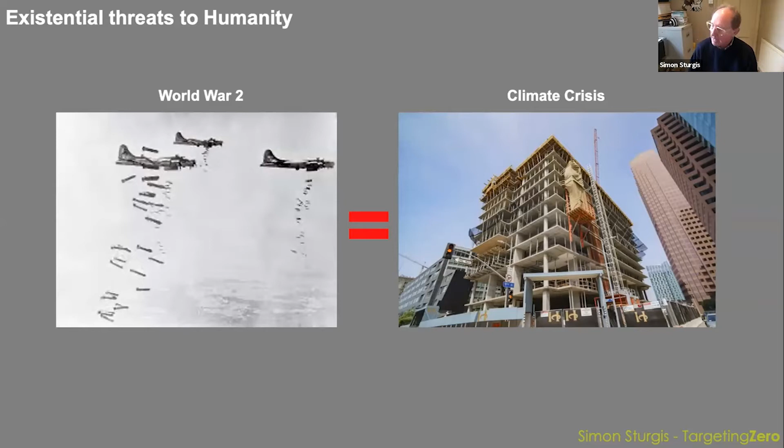But I would also equate it to construction, because if you think of the volume of construction and the impact of carbon emissions, these two things, and it's arguably a controversial observation, are not so far apart. And if you think I'm exaggerating, look at global construction to 2060: one new Greater London every 7 weeks. That is a phenomenal amount of construction. And the impact of that globally on the climate is phenomenal.

And the interesting thing is, if you look at the countries that are most responsible for resource use, on the left there you've got the number of Earths required per capita to achieve that kind of consumption, and on the right you've got carbon emissions. You'll see the same basic culprits in both cases.

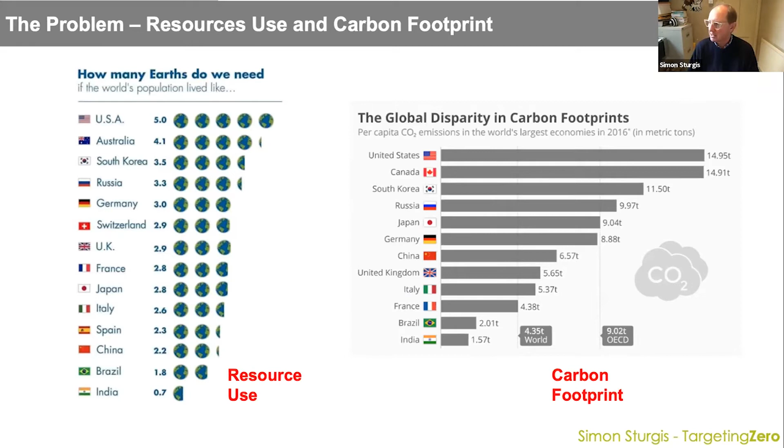And in the UK, what we're trying to do is achieve net zero by 2050, which was passed by the Theresa May government. And then you've got 78% reductions by 2035 passed by the Johnson government, which are significant asks. What has generated that is Paris 2015, COP21, which fed into the Climate Change Committee, net zero by 2050, and then the UK government's 78% reduction by 2035. So that is the current policy concern.

So getting to zero, how do we get to zero? I thought I would explain this, though I'm sure many of you are familiar with it, in terms of the modular approach. Top left, module A, upfront emissions in the green box, which are the product stage and construction stage emissions. Then you've got the in-use stage, the module B emissions, which include repair, replacement, and refurbishment, all material related. Then in blue, you've got operational energy use and operational water use. Those together with the pink represent in-use emissions.

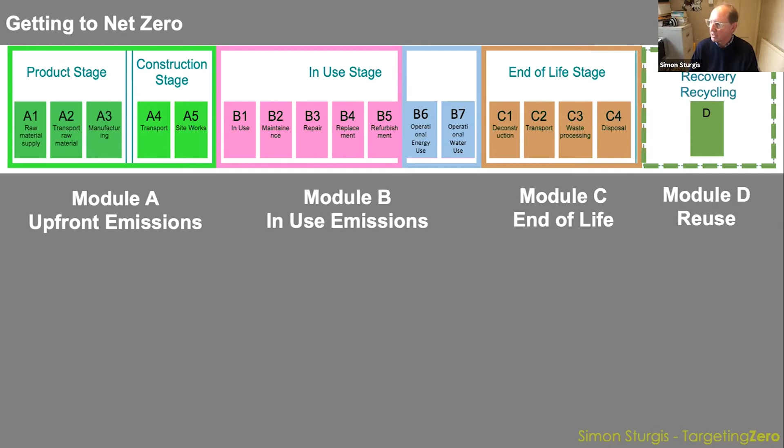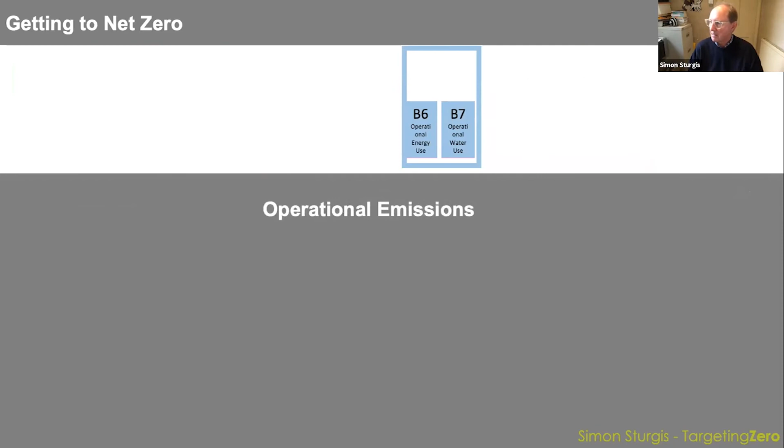Then you've got the end-of-life stage, reuse, recovery, and recycling. So all of those together represent embodied emissions, A, B, and C, but only part of B, because B6 and B7 represent operational emissions. If you add all of those together, excluding D, A, B, and C together represent whole life carbon. And to achieve net zero, you have to achieve the maximum CO2 reductions through good design, plus any residual offsets. That would give you a net zero position.

And how do we actually get to that? Well, the starting point is retrofit. Both of these building schemes here are retrofits. The one on the left is a Victorian warehouse which has been retrofitted. The one on the right is a retrofit of an existing city building, and the retrofit is saving 58,000 tons of CO2 compared to a new build version.

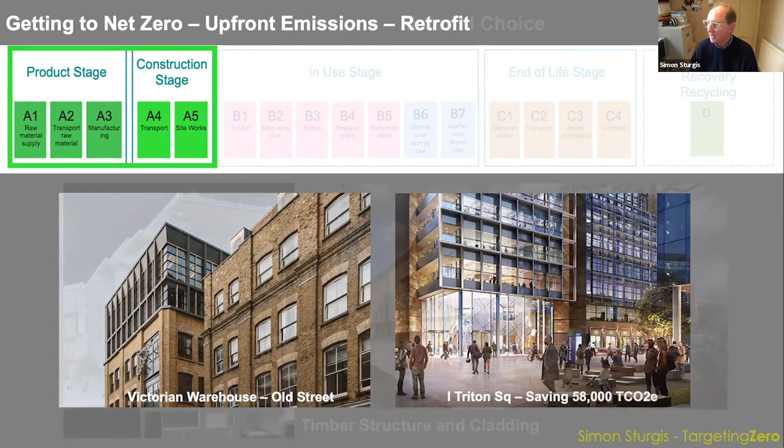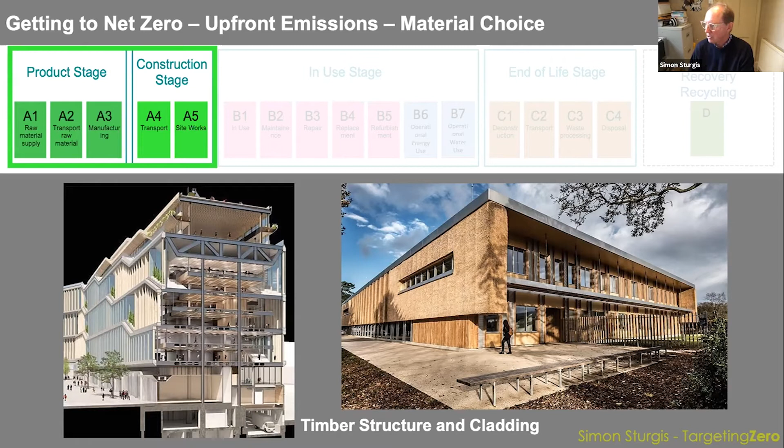Also, at the construction stage, there's the relationship between new and recycled material. New aluminium is essentially for when you're going to anodize, because you get a consistent substrate. If you're going to use recycled aluminium, then you can powder coat, which of course gives you more flexibility.

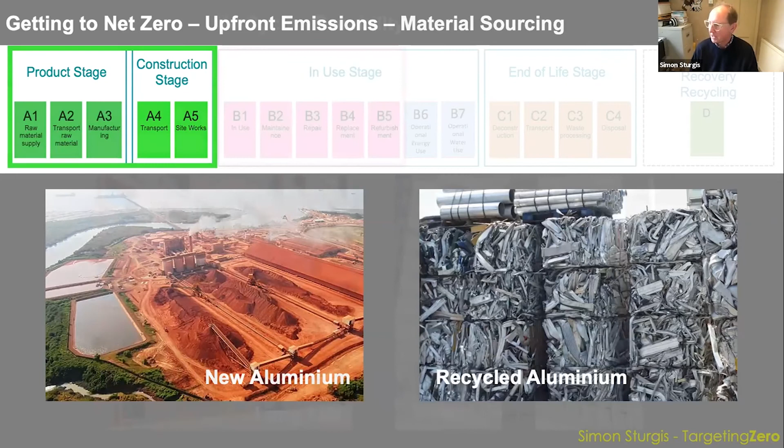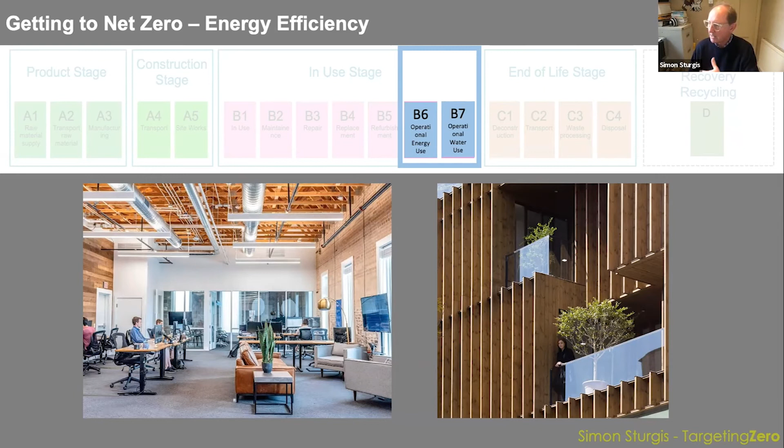You've also got energy efficiency, which I'm sure we're mostly familiar with, and things like fabric first and the louvers to protect the facades. So there is a whole range of things that we can do to improve the performance of buildings. And the end of life stage is interesting because, of course, if you're demolishing, then typically it all goes to waste, and waste also tends to be a much lower level of activity. For example, the waste goes to road fill and so on.

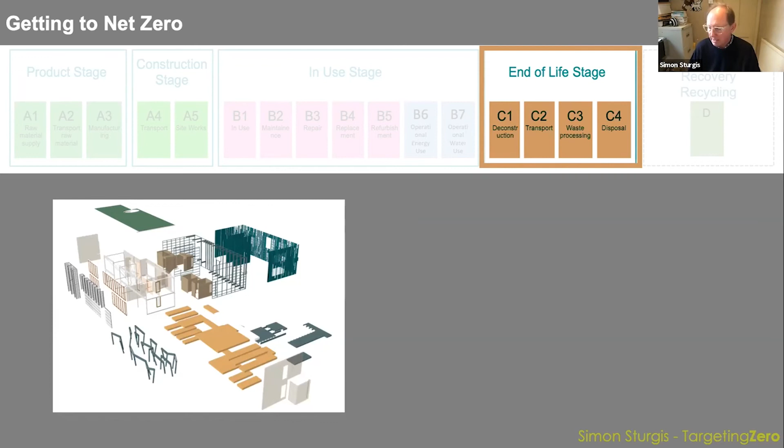But if you can actually rebuild the building, now this scheme here on the right is a project by Segro, which we in fact moved from one site in Slough, where it was going to be just demolished. We actually just had it dismantled, moved to a new site and rebuilt. And that saved a lot of money, it saved a lot of carbon, and relatively few things had to be replaced. The roof membrane, the foundations had to be replaced, but fundamentally all of that is effectively second-hand material.

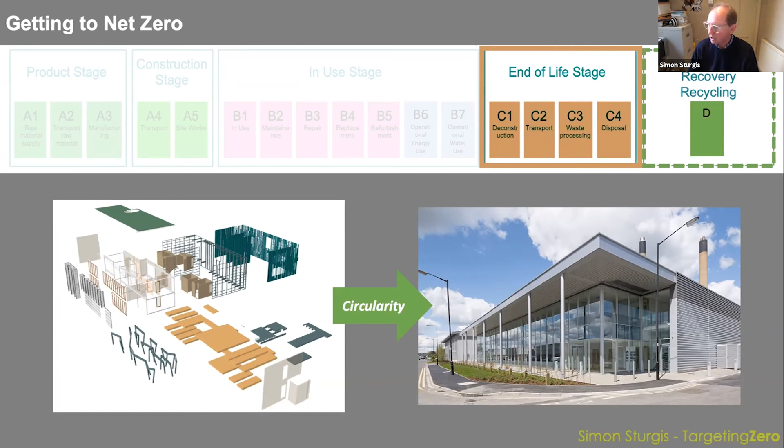So it shows that it can be done. But of course, that building wasn't designed to do that. Had it been designed to do that, we would have achieved greater benefits in terms of cost and carbon. And in terms of cost, there is this perception that low carbon is an expensive activity. This is the Google building, which is under construction in King's Cross in London.

And we were looking at the tender packages from the perspective of carbon as opposed to the perspective of financial cost. And what we found was that the one here you're looking at is the lowest tender cost, which happened to be the same tender package as the lowest carbon cost. And so we found a direct correlation across certainly about 95% of the tenders across this overall tender. So there's a direct correlation we found between low cost and low carbon.

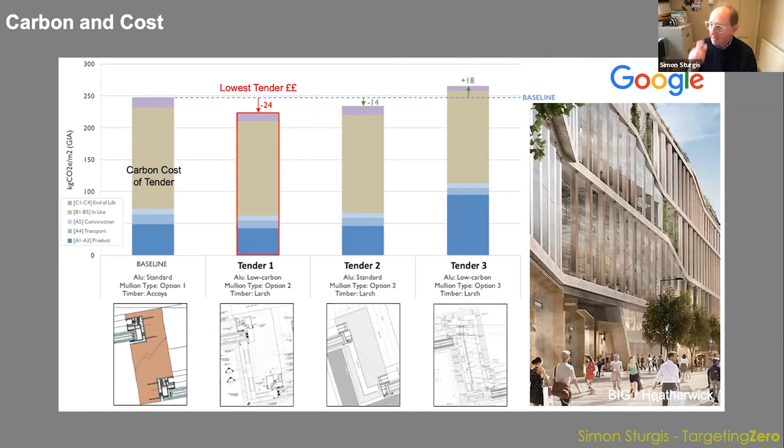If we look on the left here, you've got a column which represents the sort of total package of energy and material, the new office building, the emissions over about 60 years. So this is showing kind of the build-up of that. And I would suggest, and it's certainly my experience, that using current technology and current supply chains and so on, it is certainly possible to get 20–30% reductions, which are cost neutral. And certainly with the developers that I've been working with who will not spend extra money, this is the kind of thing that can be done.

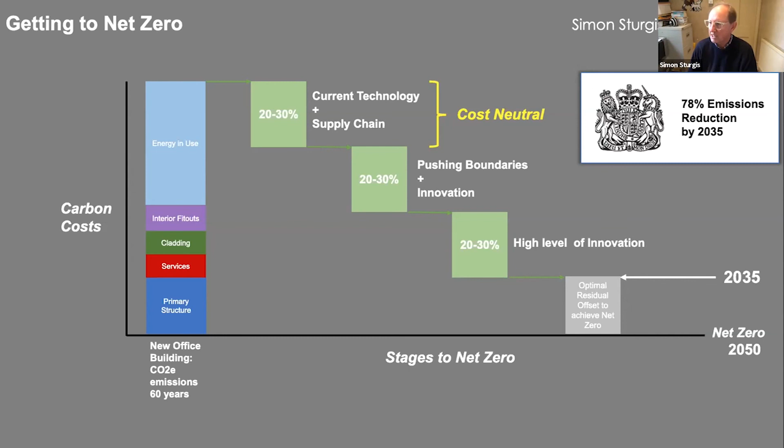So we have out there ready to achieve reductions, I believe, of 20–30% without having to spend additional money. When you get to the next step down, you're trying to push the boundaries a bit more, there's a bit more innovation required. And the next step down is obviously a much higher level of innovation. And finally, whatever's residual would be treated as an offset. So I think there's plenty of scope to act right now in order to meet that 78% emissions reduction by 2035. We just need to be a bit more imaginative of what we do.

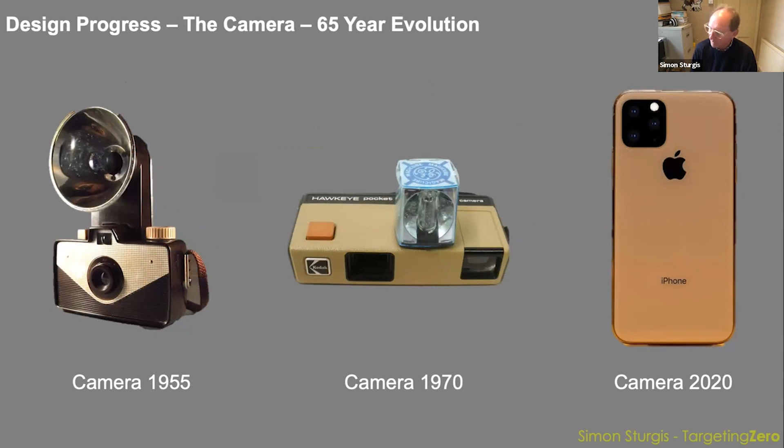You compare that with architectural innovation. London office building in 1955 on the left, and then in the middle, 1970, and on the right, 2020. And the differences are single glazed, double glazed, triple glazed. And the one in the middle and the right also have air conditioning. So we need to do a lot more. We need to think a lot more.

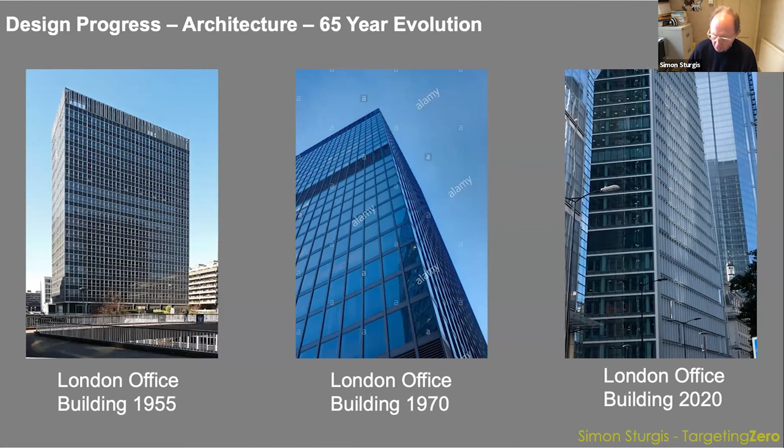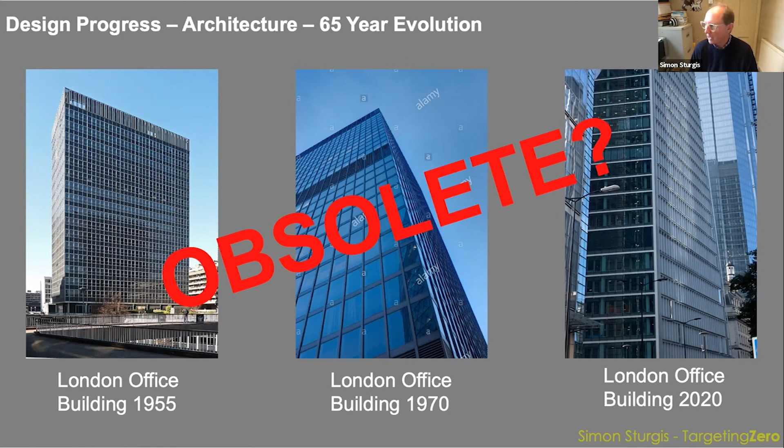And I would argue that to some extent these buildings are now obsolete, and certainly an obsolete typology, but we are still building them. Globally, we're still building them, but we need to think differently. We need to come up with new and different typologies to answer the problems of the climate crisis. And I suppose my final question is, what are they going to look like? We already have some hints, but I think most of these don't necessarily go far enough. And there's going to be a lot more innovation needed in order to sort out the problems of the climate crisis so far as architecture is concerned.